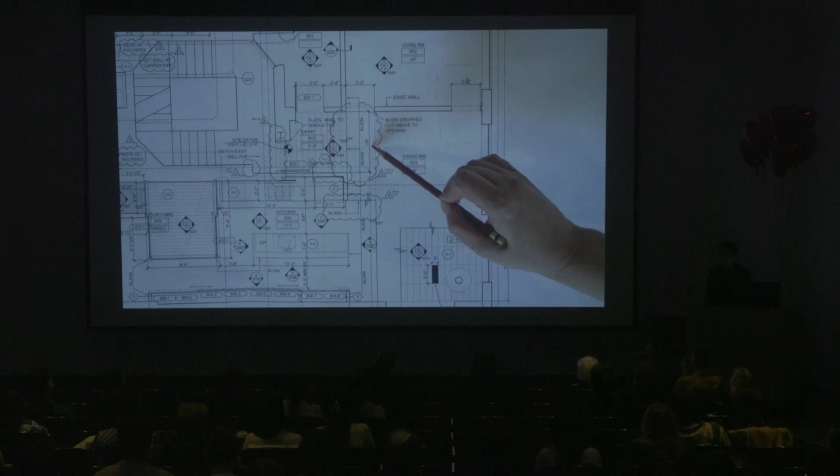So verify in field, these are three simple words. They're some of the most powerful words you might put on a drawing. I show a drawing here from an old project we did, VIF, the acronym. It's a conventional notation. It alerts the contractor that the drawings and the field might be different. There might be some condition in the field that we don't know exactly what's going on. We're inviting a dialogue with the contractor when we ask them to verify a dimension. We're also telling them what we think is really important. So I might say, this is important, this is not important, check that in the field.

I mentioned this to a contractor friend and he said, oh, you mean CYA? You know what CYA means? Cover your... but sometimes you can think of it as somehow contractual, like it's not my responsibility, it's someone else's responsibility. I think it's actually an invitation for dialogue.

I think as architects we tend to draw things at a distance from our medium. Their medium is out there, it's the physical stuff of building. Our world is actually the world of drawing, representation, notation, dimensions. Our drawings aren't pictures, they're instructions, they're contracts. I like to say, quoting Edwin Lutyens, an architectural drawing is a letter to a builder.

If you're writing a letter to the builder, what do you want to say? Please build my building carefully, build it accurately, ask me questions when you don't know exactly what to do. Those three letters tell us so much about the way we practice architecture, both the legal and risk landscape we're working in, but also the separation between disciplines and trades. So VIF is also a way of thinking about the split between the world of construction and the world of representation. These are two versions of the same thing.

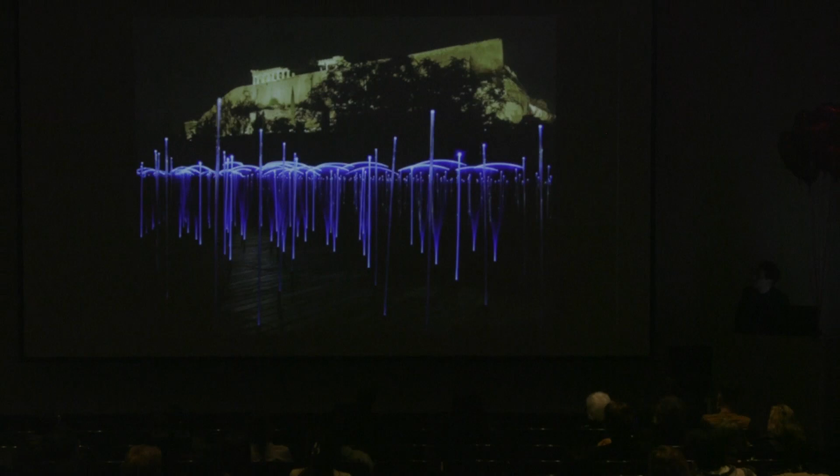The first book we did was called Expanded Practice. This is Meejin and I wondering, why do we have to stop when we get to the landscape? Why couldn't we do that too? Could we think about lighting as a medium for design? And what about media? Could we think about media as a material for architecture, just like concrete, steel, wood and glass? Maybe media and information could be the source of inspiration.

More recently, we've been working with more traditional materials like stone, discovering some of the properties and potentials of materials. This is our Collier Memorial, where we carve stone into what I call a conspicuous absence. It's a memorial to recognize someone who's gone. You go there and find this hollow and wonder what was here before. It's a kind of trace.

But this is a project we talk about as material after media. Every material is already filtered through our modeling, our sharing, our cutting, our robots fabricating, our digital survey installing. We're photographing it with a digital camera, sharing it on social media. It's always already digital, so it's traditional material, but after media.

So these two books, I think, summarize a position from: what could the expanded boundaries of architecture be, and what can we do with an expanded notion of materiality? These two publications bracket two modes in our practice.

I want to show a few different projects that exemplify some of these things, and throughout the lecture I want to point out certain things that might resonate with the themes that we're talking about for the charrette.

So this is a project that we proposed, a public art project, in Spokane, Washington. Spokane, a city of incredible beauty, a site of incredible resources and extraction, right, lumber.

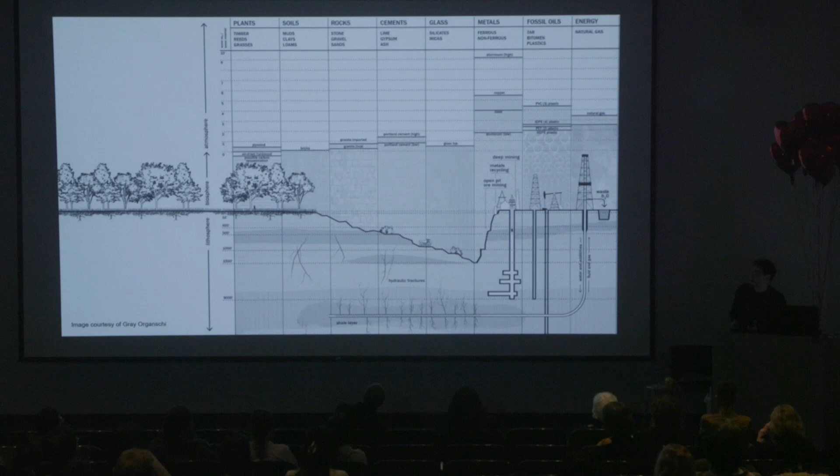And so we've been wondering about wood, and people are so enthusiastic about engineered lumber, mass timber. Can we use renewable materials to replace steel and concrete? We totally are excited about that.

But when I think about wood, I think about carpentry, I think about craft. Turns out wood today is a product—an engineered product. The dimensional standards are so large that it's not about a single tree anymore. It's about these large sheets, these large beams that have been designed to span longer distances.

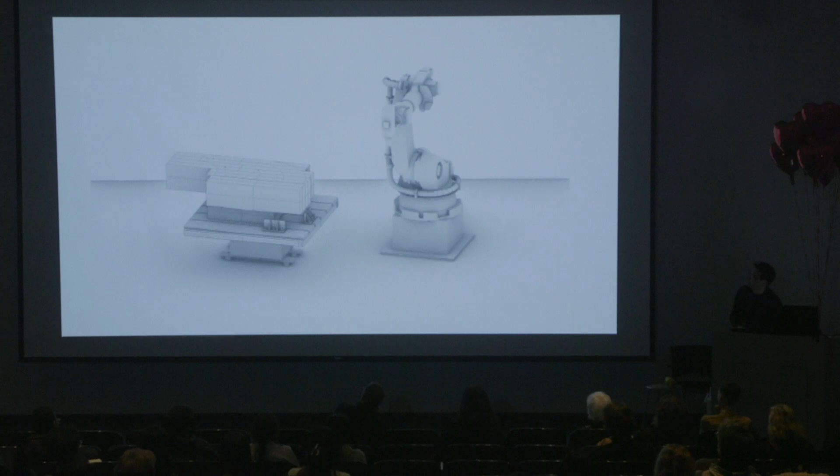As we started thinking about mass timber, I wondered, instead of replacing steel and concrete in the format that steel and concrete typically takes—like a beam or a column or a slab—what about the sculptural aspect of mass timber? Can we use its mass and its volume? So we looked at the kind of cutting movements of a robot and asked, would that give us a different capacity to shape?

We purchased a bunch of Alaskan yellow cedar and we lammed it up. We produced our own glulam, and then we started carving it into these three-dimensional forms. If the surfaces are not parallel, they start to become sculptural. Could we think about this massive mass timber as not just a replacement, but having its own syntax, its own vocabulary, its own formal capacity?

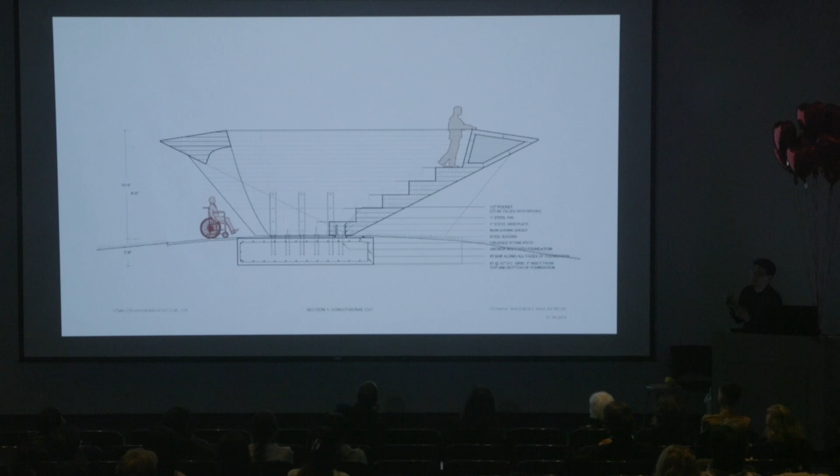So this is the proposal, this little mini amphitheater that's made of stacked mass timber that's been milled into these beautiful blocks. And look at this configuration here. This is a small social setting in a public park along the river in Spokane.

We imagine a person standing here, maybe gathering a group of people. Maybe it's for a poetry reading, maybe it's for a small concert or a performance. But there's also two audiences—maybe they're in dialogue with each other. We sort of imagine the social scenarios that this little structure could enable. In a way, that motivates the whole project: can we imagine a kind of conversation here, a kind of a happening, if you will?

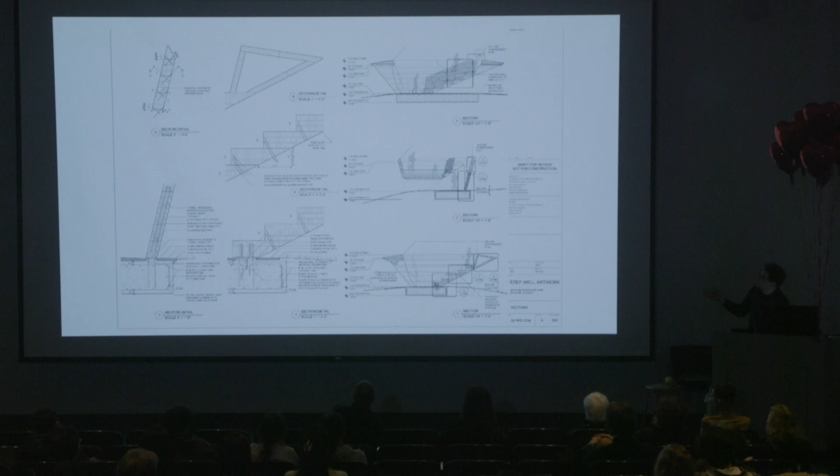And so we proposed this, we got the funding for it, and we started working with fabricators to make the components. We learned how to assemble mass timber because we didn't know. Whenever we find something curious that we don't know about, we make a proposal and then put all of our attention there.

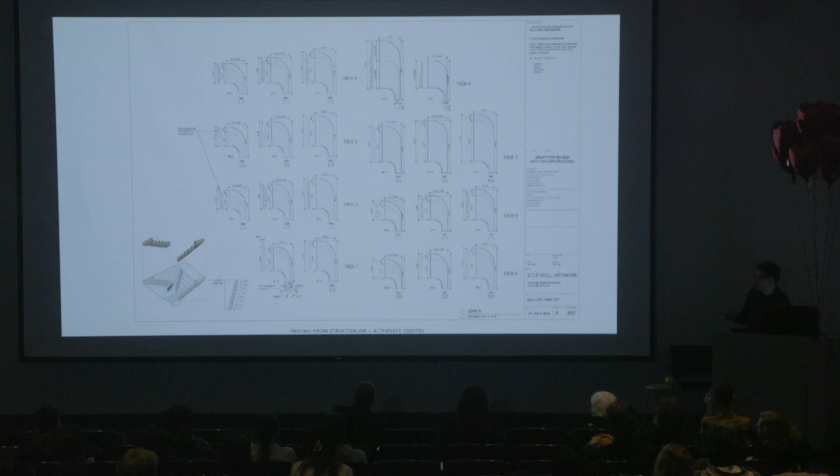So how do you work with mass timber? What are the largest sizes we can make? Can we make them in the shop and bring them to the field? Do they fit on a truck? How do they get assembled, in what sequence, how long would it take? And could this be something that's quickly assembled in the field and then erected to produce this kind of sculptural folly, if you will?

It's a folly in the sense that it doesn't really have a set program. It can accommodate just about any program.

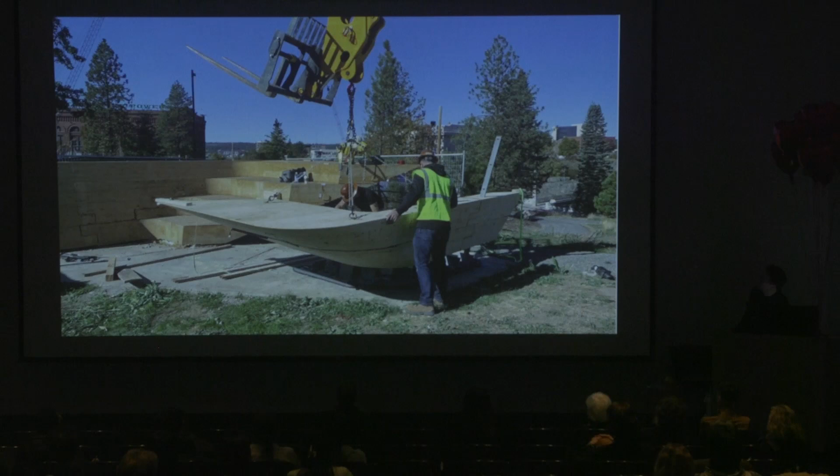Working with fabricators, we learned about carving mass timber. What are its dimensional qualities? Does it expand and contract with humidity? Yes, it does. How do you shape it into something incredibly beautiful where the grain of the wood is still legible? And how do you stack it, how do you erect it, how do you fasten it together? Mass timber requires long stainless steel screws to tie it all together.

So this is us compensating for a lack of knowledge and a kind of curiosity about a new material, trying to build a kind of set of experiences and build some expertise.

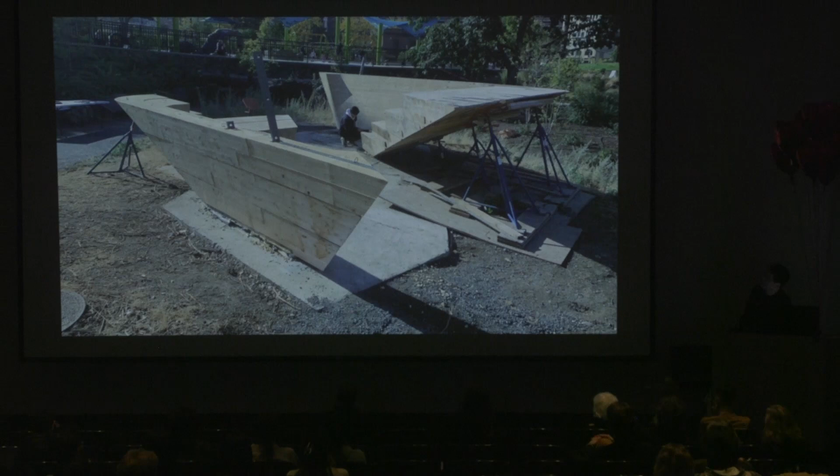Architects are confronting new materials all the time. How do we know enough about those materials to be able to propose a structure, whether it's a piece of architecture or a kind of proto-architecture like a pavilion in a park?

Thinking about parks and public space, a lot of our work has to do with environments that are social settings, whether they're landscapes or urban contexts. We have been working around the world.

We've been doing a number of projects in China, and I want to show a project that was completed over the pandemic. This is Shanghai, the Huangpu River. This site here was an industrial site that became the expo site in 2010. So that was an expo.

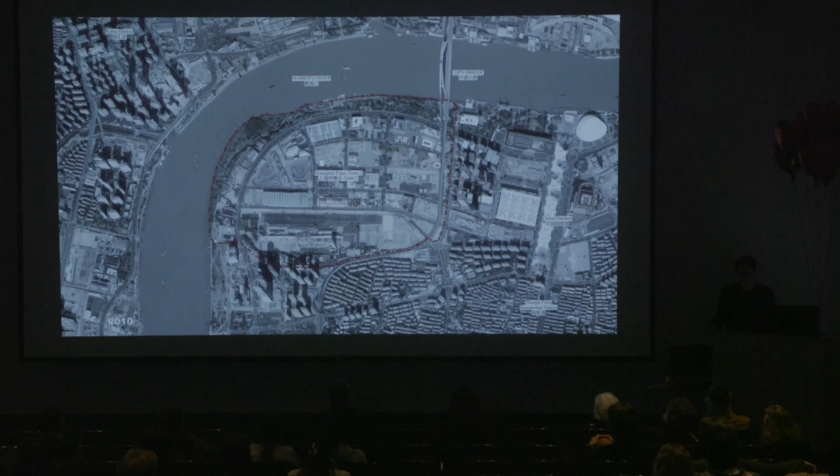After the expo, the Shanghai government decided to turn it into a park. Some of the historic pavilions are still there. There are also new buildings, this one by Snohetta. And there was a competition for 2 bridges over an artificial lake in this new park.

Our proposal was, rather than 2 bridges, let's make one and put a hole in it. So it's one bridge that is punctuated by a series of figural openings, if you will. We call it the Moongate Bridge.

We have these circular cutouts, and those circular cutouts traditionally frame views in a garden. We thought maybe rather than framing a view, we frame the water and we frame the sky. So we proposed this as a new landscape, as a kind of extension of the park.

It wasn't about a kind of efficient span, like from an engineering point of view. It was about a kind of landscape continuity from a public point of view. It was about sponsoring events where you could stand here by yourself, or you could gather as a large group. So what could we imagine in terms of gatherings for different sizes of communities?

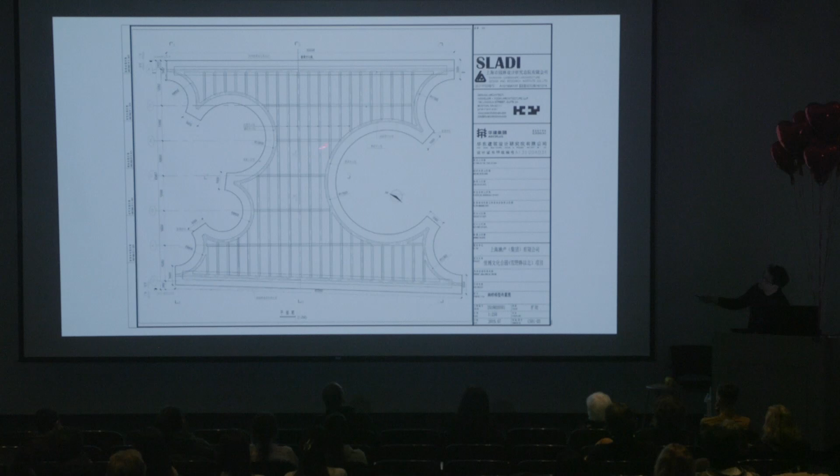So 1 or 2 people versus a whole community. This competition, we were surprised and delighted to learn that we had won.

And we got a message like 6 months later saying, oh, you've won, we've been developing your design, but we can't seem to get it approved. Would you come back and help us get it approved? So that's fairly typical, actually, unfortunately.

So over the pandemic, we were thrilled to see the development. This is the deck, a concrete deck, and the artificial lake. We were surprised to learn that they'd put a parking garage under the lake. So it's a bridge over a lake over a parking garage.

So it's a new nature. It's not nature like the way you thought it was. It's actually all constructed.

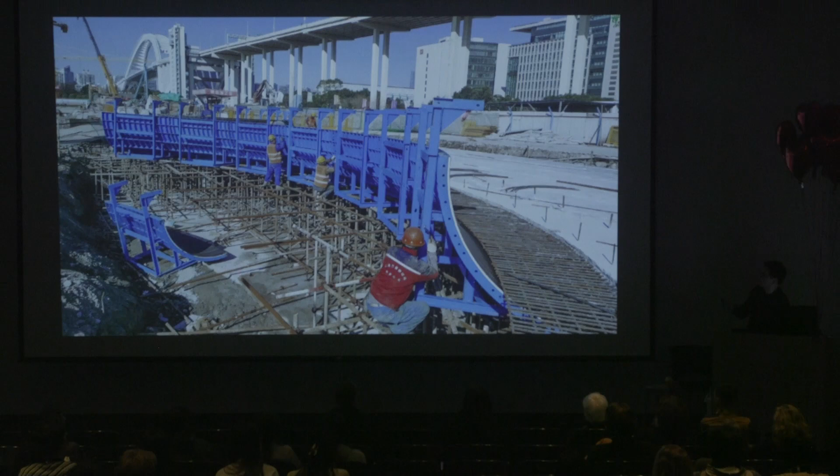But in China, they say anything is possible, but nothing is easy. So you can build a compound curved toroidal concrete formwork that produces something as beautiful as this underbelly for the bridge.

And then on the inside, we wanted all the granite blocks to be articulated. So as the granite pavers fold up onto the surface of the parapet, the rotation of the granite blocks turns, and we see the little edges of every little block. So it's not smooth, but it's calling attention to all the part-to-whole relationships between the module and the big urban gesture.

So this happened actually over the pandemic. They completed the bridge, and we get these moments of solitary, contemplative space. You're looking out over the landscape, but you also have the capacity to host a big event.

You could imagine a festival taking place on this bridge. It's basically a plaza that happens to span over the water, which is spanning over the parking garage.

Thinking of water and ecosystems, a few years ago we proposed an installation, a public art installation in Philadelphia. This was called Float Lab. Philadelphia, as you know, is a city between 2 rivers, the Delaware and the Schuylkill.

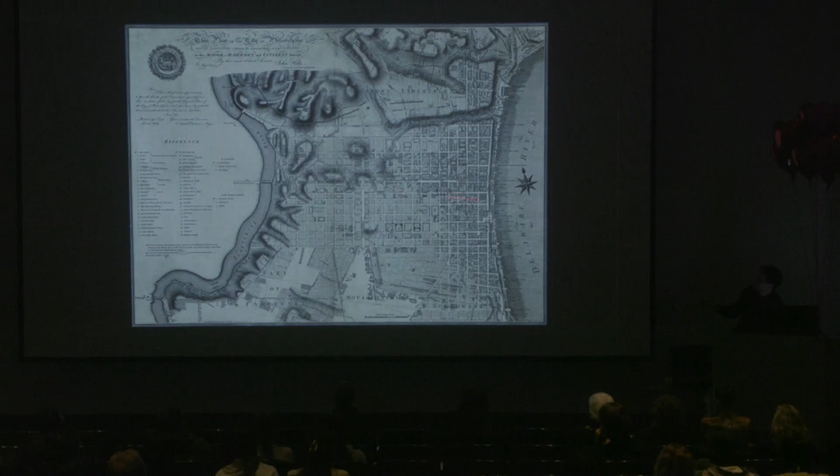The grid that spans between them was a site of commerce, of trade, but if you follow the river, the tributary, up, you get to coal country. This was a site of extraction, so coal was being shipped down the river. It was a highly polluted riverway, and it is the kind of original Superfund site.

So the remediation of the Schuylkill River was, before they had Superfund sites, they were trying to remediate the ecosystem at the Schuylkill River. They say that it was so polluted it caught on fire. Imagine a river catching on fire. Actually, not that hard to imagine.

I think of Philly as this quaint historic city, but it's actually this sort of center of energy and extraction. And so how do we tell the story of this river? How do we bring people back to the waterfront?

I think some cities turn their back on the river. And Philadelphia was saying, we want people to come back and experience that river waterfront. So Bartram's Garden is one of the original botanical gardens in this country.

And so we partnered with Bartram's, we partnered with Philadelphia Mural Arts, and the Float Lab was positioned right off of Bartram's Garden. The mission of Bartram's is to expose urban Philadelphians to nature, to species, to ecosystems—a kind of environmental and ecological education.

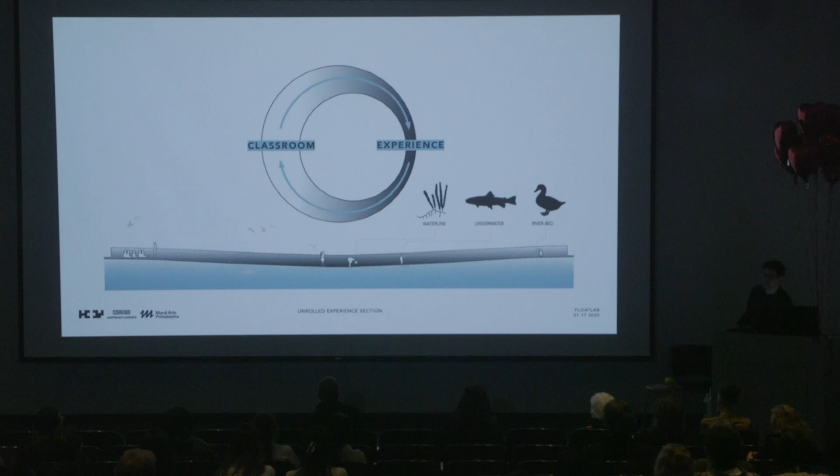So the idea was that this barge was essentially an outdoor classroom. You come to the classroom, you experience the river in a certain way, you take away certain experiences, and maybe when you go back to your home or place of work, you behave a little bit differently. Why? Because you've had this exposure to the river, and it's changed the way you perceive landscape, the way you perceive nature. We call it a kind of eco-literacy.

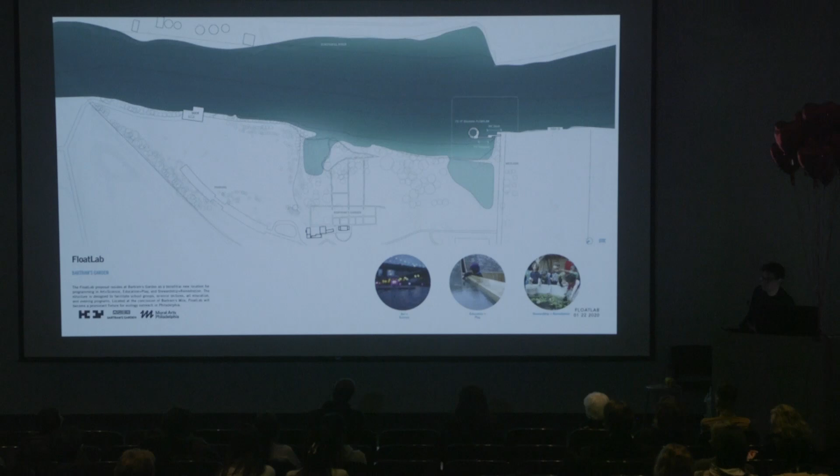Can we use an architectural intervention to build a sense of eco-literacy? So this is the proposal: a floating barge, but importantly, it's also a submersible. In order to bring someone into this eye-level perspective of the water, we need to sink the barge. It has a chamber of water so that it sinks.

It's kind of a controlled capsizing. There's a chamber of air and a chamber of water to bring it down to the water level just the right amount. This is a study model, so that you get that experience.

So this is a prototype we built. This one has steps in it. But if you fill the tank, you basically get that eye-level view of the river because the submersible is full of water. And that's monitored and pumped to make sure it doesn't sink too low.

This principle was tested as a mock-up, and we like to build a lot of mock-ups to prove our ideas. We spent $50,000 to build this mock-up, painted it yellow, and brought the William Penn Foundation to the site. They were like, this is awesome, this is so impressive, let's fund this. So they funded the project with $2 million to build the yellow submarine.

That will ultimately be exhibited next summer, I think, in the Schuylkill River. So if you're in Philly next summer, come and see the Float Lab project in the Schuylkill.

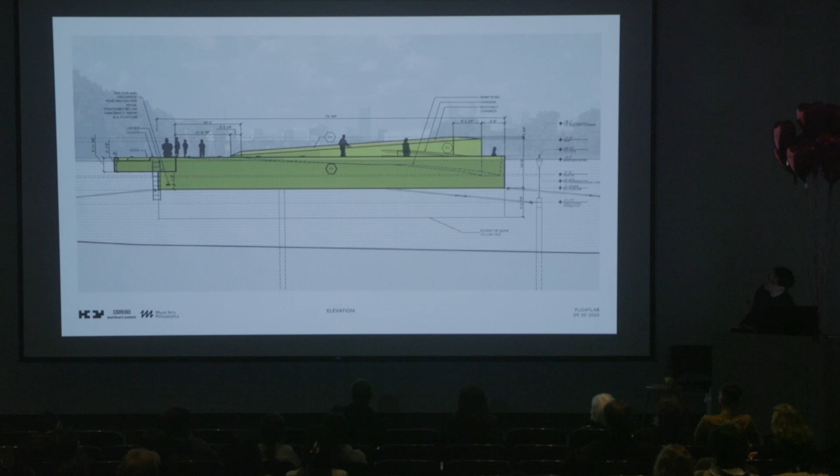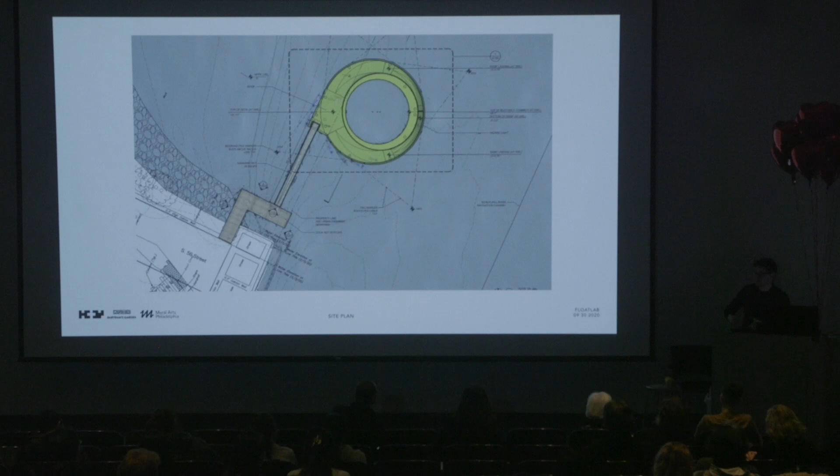These are some more technical drawings, like how do you make a submarine work? We're not sure—we're often, I'd say, beyond the traditional limits of architecture, so we don't know about submarines. We actually hire a naval architect, a boat designer, barge fabricators. I think the thing about architecture is there's so much we don't know that we just need to collaborate, we need to partner, to build a kind of experience and expertise.

So this is the Float Lab project. We imagine different kinds of interactions happening here, where people are interacting with each other, interacting with the periscopes, interacting with kayaks, interacting with the ecosystem around them.

And you think it's all about renders and beautiful renders, but also it does get fabricated out of steel, and it's welded together, and it's tested, and it's shipped, and it'll launch next summer. So I still get goosebumps when I see architecture turn from a drawing into a thing, into an experience, into something that people interact with.

So that's pretty exciting. We've been thinking a lot about the public—how do we build a kind of public, an educated public, a discerning public? We have faith in institutions. We have faith in our political system.

I love this quote by MLK: if we were to be a great democracy, we must all take an active role in our democracy. We must do democracy—the doing of democracy. It's not a concept, it's actually an activity. We have to exercise—someone talks about civic muscles. We have to exercise our civic muscles by voting and participating.

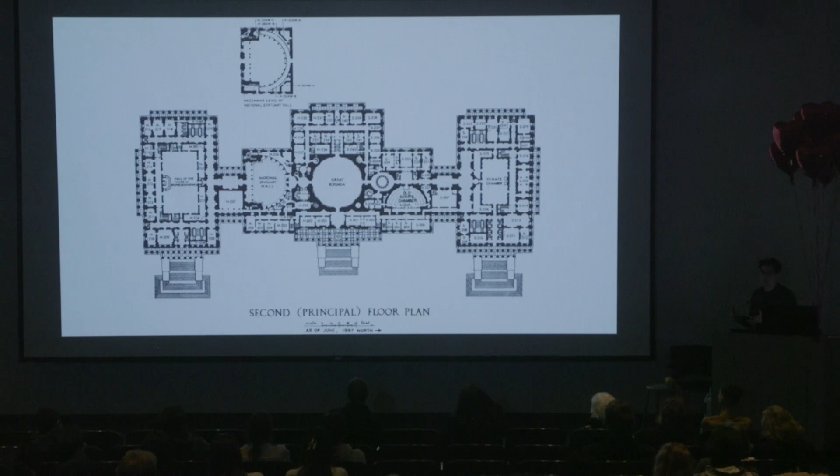At the same time, we interviewed to design an Institute of Democracy at the University of Virginia. So as part of our research in terms of what an Institute of Democracy should look like, we wondered, what do spaces of democracy look like? And so we started doing some research in terms of the hall.

You know the House of Commons in the UK. It's organized like two halves, and the structure of the room is the structure of debate. It's facing each other, confrontational, and that particular arrangement of seats produces a certain culture of politics, a certain debate culture. I think about the United States and our half circle, the horseshoe. Turns out Russia has a rather frontal configuration. And I've never been here, but I love this idea of the pure circle.

We started thinking about democracy and this relationship between, as Antoine Picon would say, decor, like the space, and decorum, like the practices. Or as Steven Levitsky and Daniel Ziblatt wrote in their book—what was the name of that book—it was about the death of democracy, the end of democracy. Anyways, they talk about the unwritten rules, and when unwritten rules start to erode, that's when our democracy starts to fail. I think about architecture as participating in that kind of gray zone of unwritten rules.

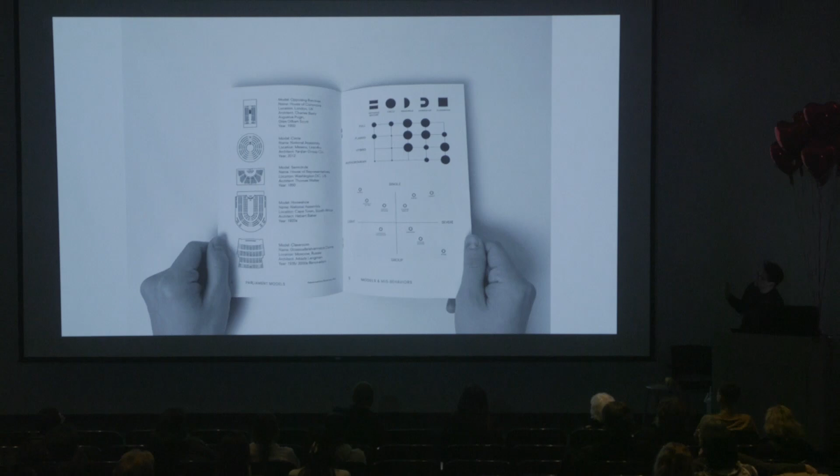There's a kind of behavior that's expected in a lecture hall. There's a behavior that's expected on the sidewalk. There's a behavior that's expected in an elevator—you step into an elevator, you behave differently, right? And so these sensitivities led us to do some of this research in terms of sites of democracy, sites of participation. This became an exhibition we showed at the Cooper Union two years ago called Model Behavior.

In the meantime, we're working at UVA again. So this is the famous lawn. The memorial is right here, actually. This is Jefferson's Academical Village. UVA is building a kind of—I think they call it the middle. This is Central Lawn, Central Grounds. Maybe that's North Grounds, maybe these are West Grounds—I don't know, it's a new master plan.

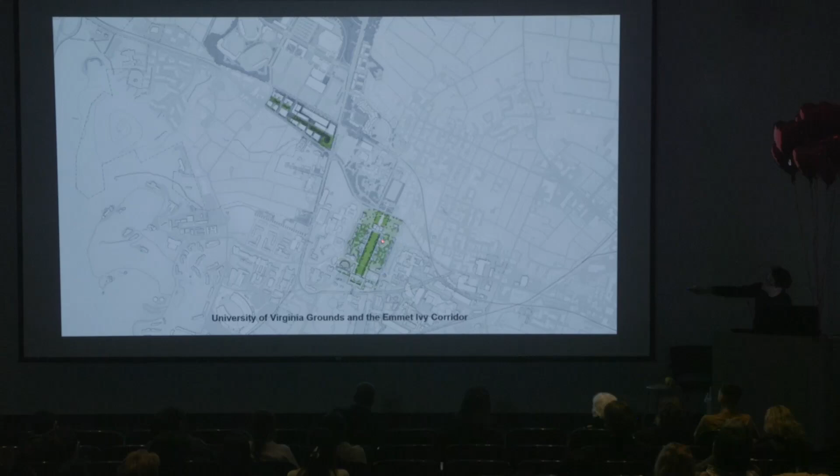It's a new part of campus, and the Institute of Democracy will be the terminus of this new lawn, just as the rotunda is the terminus of the historic lawn. So that's a lot of pressure. They're also building a school of data science, a hotel, a conference center, and a new performing arts center and museum. These are all arranged around a rather formal landscape, and the Institute of Democracy is the terminus there.

So working at UVA, we had to think about what's an appropriate response to this very frontal, formal axis. How does Jefferson's Rotunda respond as a kind of figure and a colonnade? Our Institute of Democracy interprets that, redeploys it, making the hall—there's a big lecture hall—kind of analogous to the rotunda. It's a sculptural figure seen through the screen of columns.

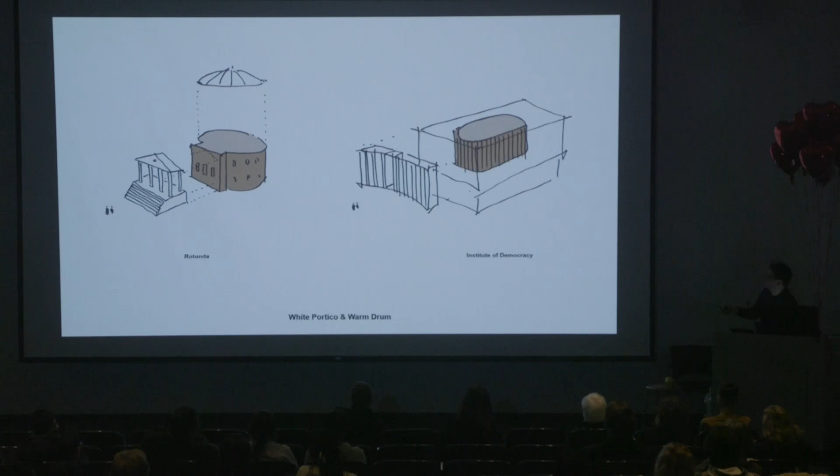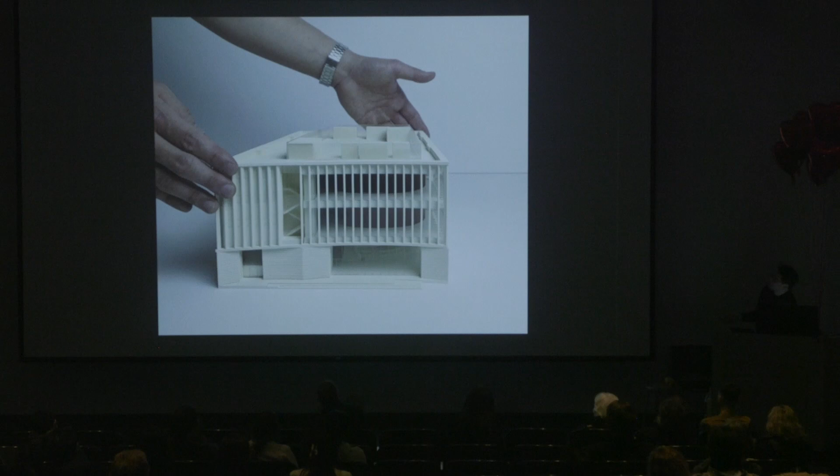Whenever we studied this project, we always turned the hall itself into a kind of figure. This is an academic building—there's no government meeting here—but still, as a room like this one, where scholarship is being presented, ideas are being debated, it has its own decorum, its own social codes, and its own presence on campus. So there's a kind of rotunda embedded within this Institute of Democracy that's legible, accessible; the base is open and porous. We're trying to bring people in, show them how to get to that hall, and show the different parts of this building stitched together.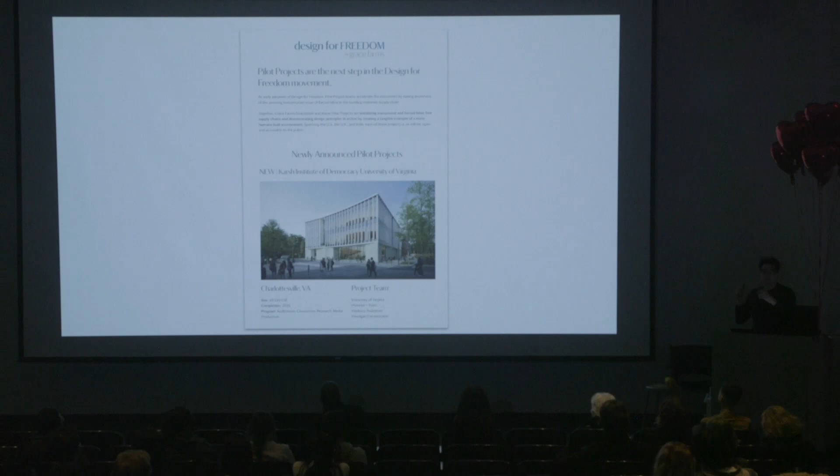Another exciting thing is that it's a pilot project for Design for Freedom, which isn't really a sustainability metric like LEED, WELL, Passive House, or Living Building Challenge—those all have different interests. Design for Freedom asks where our materials come from, who made them, what we know about those people. Can we certify fair trade architecture the way we certify fair trade coffee or fashion? Can we say this building has no forced labor? That's obviously hard in a global supply chain, but Design for Freedom asks those questions up the procurement chain to understand materials and try to certify they're made without forced labor.

More public realm projects—this is a proposal in Chengdu, a residential development with no cars. Many of the waterways have pedestrian bridges, and there's an electric car network passing through. We were asked to design this pedestrian bridge, and we asked who's doing the landscape. We didn't know, so we thought maybe our bridge could produce the landscape.

The idea was that the bridge is a series of linear members fanning relative to each other, and in their rotation they produce the dimension of the bridge while also producing the terracing of the landscape. I like that the same technique producing the underbelly of the bridge also produces the top surface of the landscape.

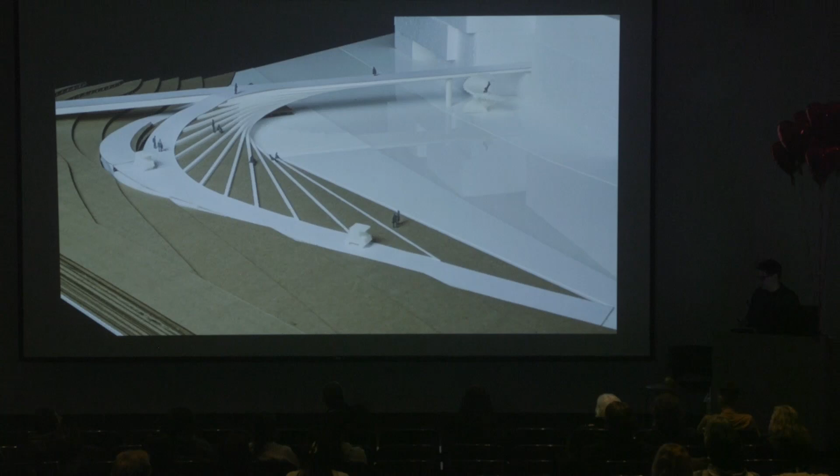These diagrams show its conception—it actually worked better with a curved stick. The curved sticks are arrayed and produce the geometry of the bridge. The underbelly is part of the beauty of it, with a twist happening as these ribs turn into retaining walls in the landscape.

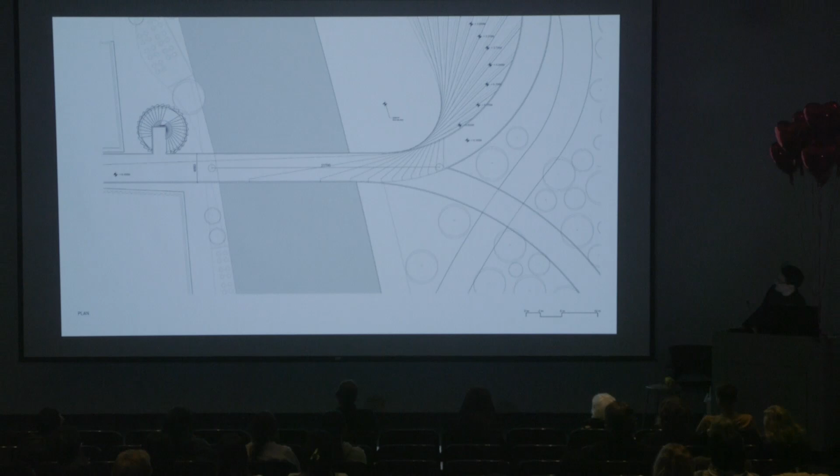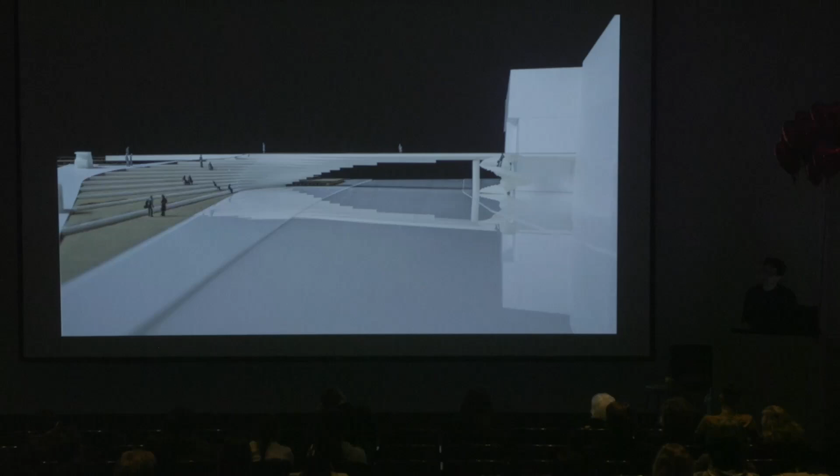Those are views of the top and bottom surfaces of the bridge. We believe design that anticipates its construction is better, so there isn't the surprise of figuring out how to make it. If we imagine a rotated piece of precast that's also a retaining wall and also a soffit condition, that helps us think through design differently. I call it a kind of tectonic imagination—if you can imagine something and how it's made, what materials, what trades, what crafts, that helps.

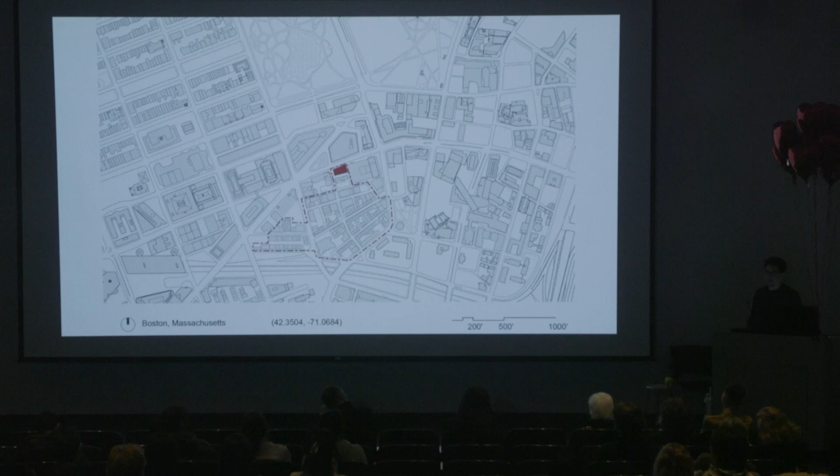Another example is a building in downtown Boston, near our office, in a neighborhood called Bay Village—a beautiful little neighborhood of two- and three-story brick buildings surrounded by taller buildings, famously called the High Spine by Kevin Lynch. In this condition between the historic neighborhood and the High Spine, a developer asked us to propose a multifamily building, which happens to be in a historic landmark neighborhood. So we had to appear before both the Boston Civic Design Commission and the Boston Landmarks Commission—a crash course in historic preservation and landmarks permissions.

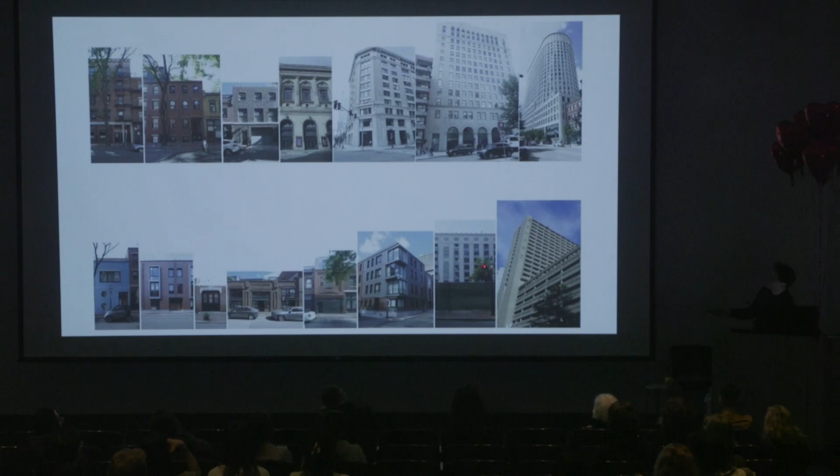So we surveyed the buildings around—there are beautiful little buildings like this, but also others like this, with plenty of classical and Beaux-Arts architecture.

So when we were asked to make a 20-story building here, we said, not only are we making a building, we're completing that street. The street has only one side. Let's make the other side of that street.

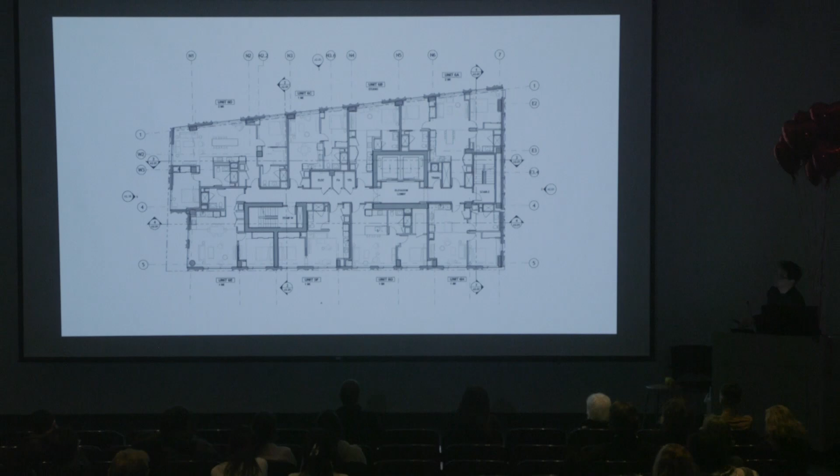So this is the floor plate. It's a 7,000 square foot lot. We have 7 units packed in there really tight.

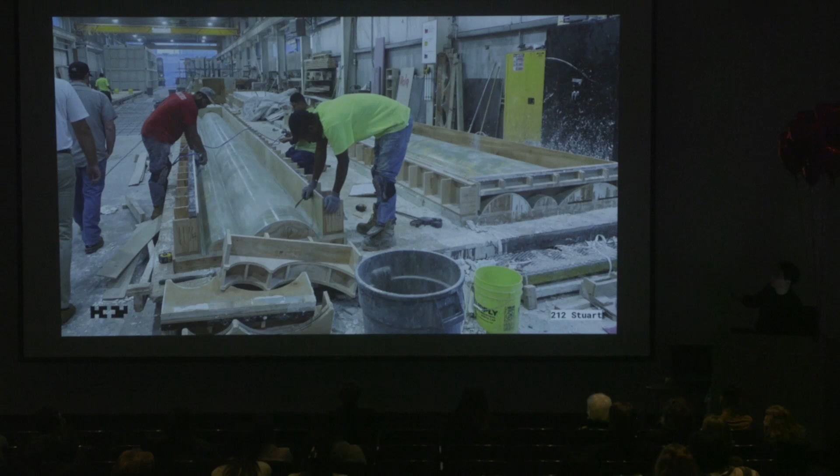We imagined them really long, because we knew they had to come into the city and get hoisted onto the building. So we tried to find a module that was extremely long, 30 feet long, that would go up 3 stories at a time. We thought we could be smart and optimize the number of molds. Turns out the mold isn't the cost, it's the crane time. So it got optimized not just for molds, but also for weight and the time it takes to erect it.

So if you ask a builder, what would make more sense? How could we save some money? They'll tell you that the panel size is key because it takes time to pick up every panel and hoist it up. So I think listening to the people making the building, asking questions like what's an optimal weight, what's the optimal width, how long can we make it.

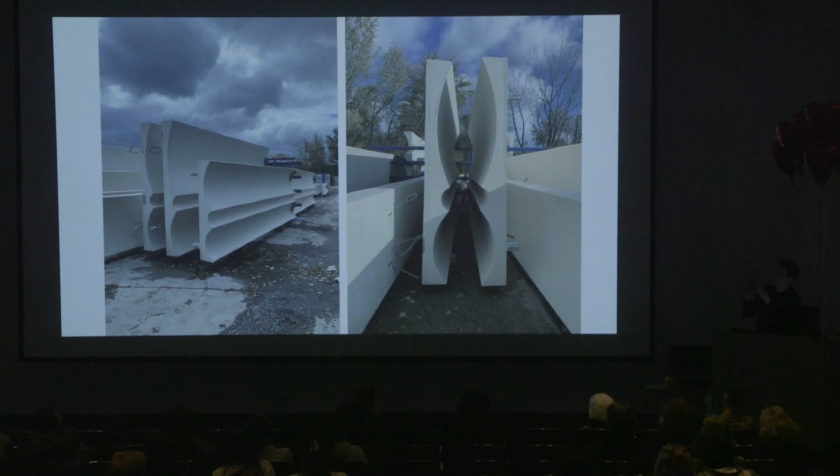But as they were making it, we noticed how beautiful these shapes were. It's almost like a Brancusi, that space between these concave surfaces. And when they were erecting it, I took this picture. This is a 30-foot panel. You see this little guy here. These are 30-foot panels.

So it has a kind of abstraction, and it's hard to understand how big it is because we usually expect joints here and here. We expect architecture to be a bunch of parts that have been assembled. And when those parts are proportioned differently, they really transform the perception of the building.

So here it is under construction. With the panels, the glazing was imagined as a series of infill panels between the sculpted exterior. And we get this photograph that's just, I think, quite striking with its undulation and the way it casts shadows.

I think working in a historic neighborhood is not about this style or that style. It's about a sense of quality, a kind of attention to detail. It has thickness, it has depth, it has something that seems like it would endure.

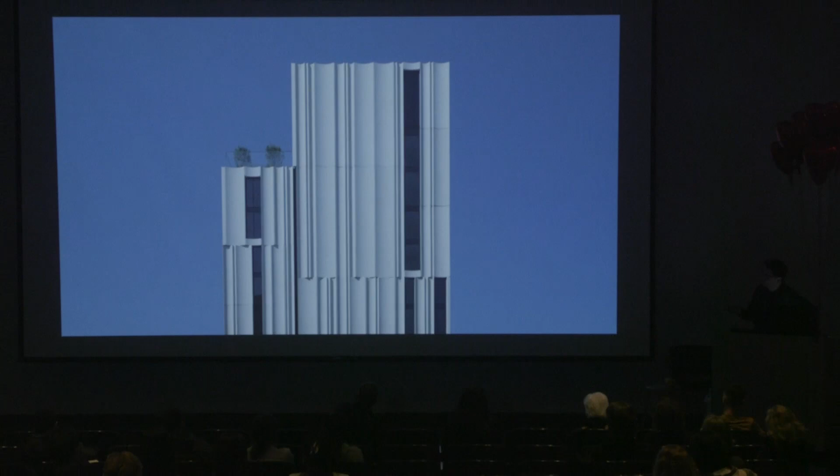And so when it meets the ground, this was important — these are the neighbors that come to every public meeting, the guys across the street. They said, I don't want to see your loading dock, I don't want to see your mechanical screen, I don't want to see all that stuff. And we said, no, we'll put the loading dock on Stuart Street. We'll have 2 more front doors. These will be stoops. And when you open your door, you'll be looking at neighbors, not looking at loading docks.

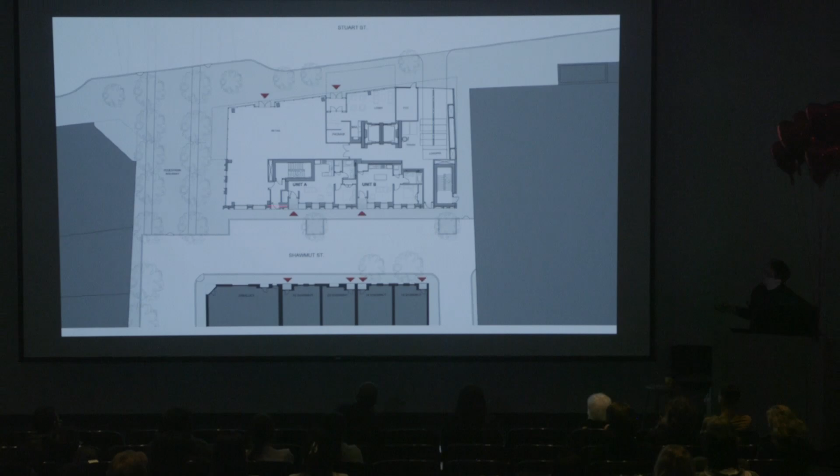And so we designed 2 townhouses facing these 2 townhouses. And when they open the door, they look out, they see a planter, they see some ironwork, they see a wood door, they see neighbors. That's such an important lesson. Developers are trying to create all this density, but how the building meets the ground and completes the street with neighbors — I think that was an incredible breakthrough that was probably the thing that allowed this project to go forward at all.

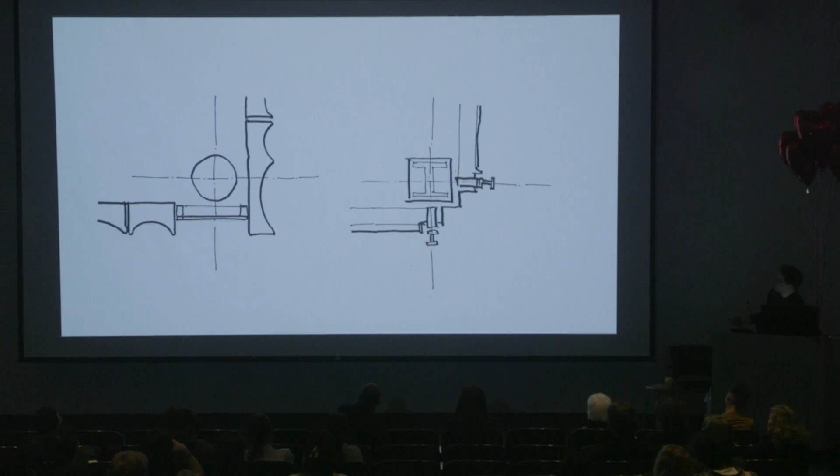For the architecture construction nerds, I always show the Mies Seagram Building corner, and then this is Stuart Street, where we have the panel and then glazing and then panel, alternating back and forth as it goes up. I talk about this in my construction class. Mies is showing us the way the building is assembled of parts, standardized parts that reveal the kind of half column on the corner. Instead of Mies, we have an alternating biased panel with the glazing alternating between opaque and glazed. So it's a riff on that.

I love the fact that the pier meets the ground, and when it meets the ground, you can almost stand in it. It's almost like it's hugging you, right? It's almost the scale of a body. So even though we're playing games with the perception of the building's height, it still has this scale of the body almost inscribed in its geometry.

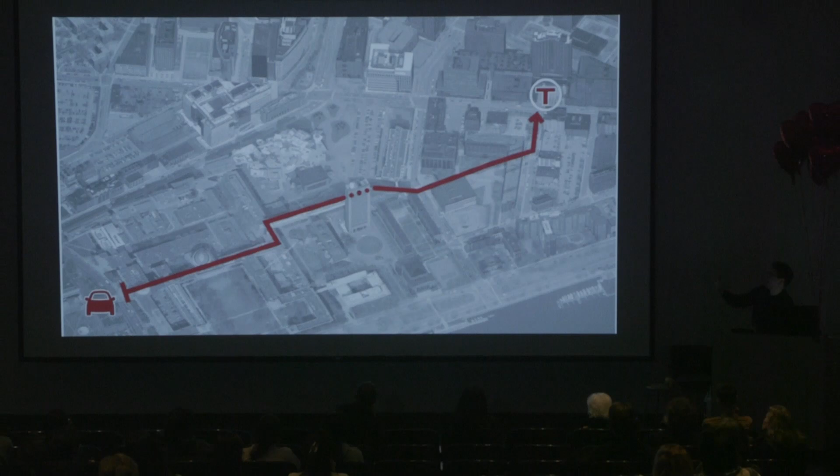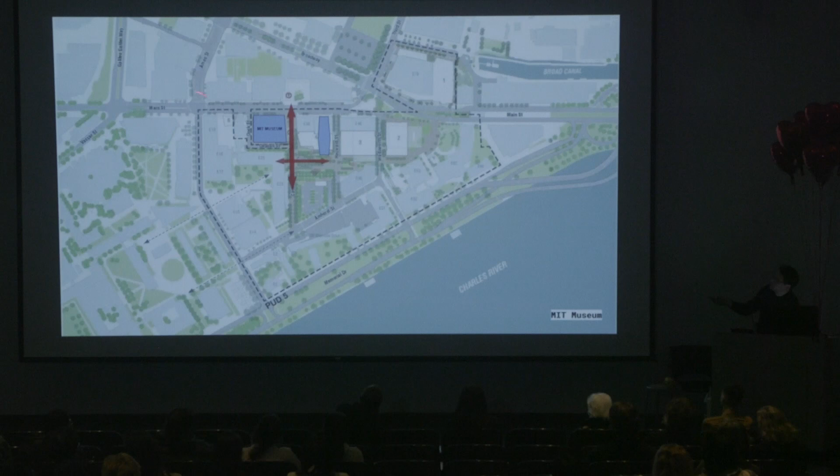When we think about public space and activities, the public space doesn't stop when you go inside a building. This is the MIT Museum that we conceptualize as on the other end of the Infinite Corridor. If you know MIT, there's 77 Mass Ave, this is the Infinite Corridor. This was East Campus, and it had no 'there.' People showed up there and said, 'Where's MIT?' So there was a series of buildings built called the East Campus Gateway, and the museum was one of those anchor programs meant to announce MIT.

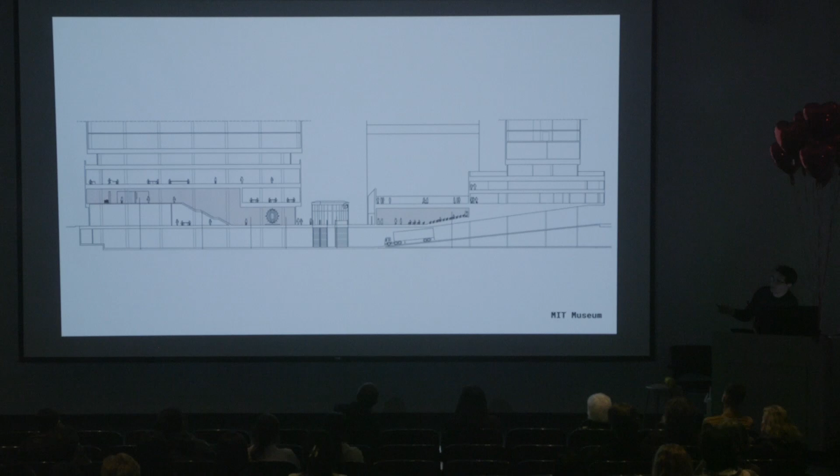So this was a dormitory building designed by Nader Tehrani. This was a core and shell office building designed by Weiss/Manfredi. They're tied together with the below-grade parking. But the MIT Museum was occupying the bottom 3 floors of this office building, in a way separated from the shaft of the office with this sort of podium scale.

So we thought about, well, what is a museum? Is it about display and collect, which is what many museums are? There's a front of house and a back of house. We said, what about teach? It's a teaching museum, and could we make space between display and collect for teaching? This was a kind of crude diagram. I think people that know museums know that that's actually super inaccurate.

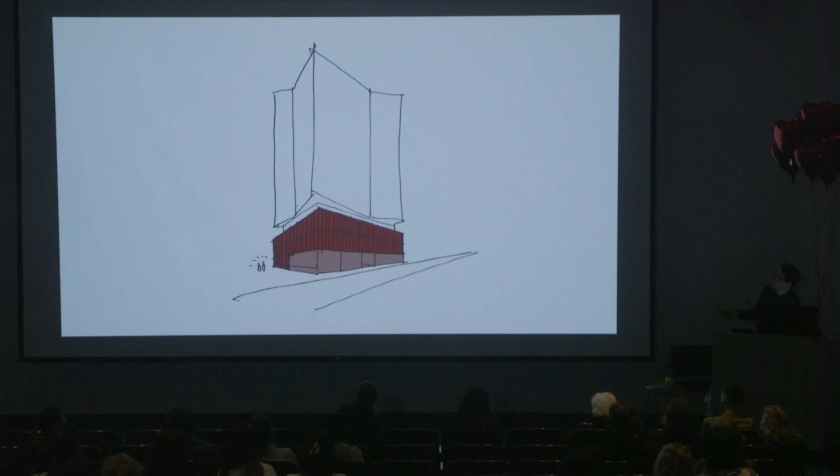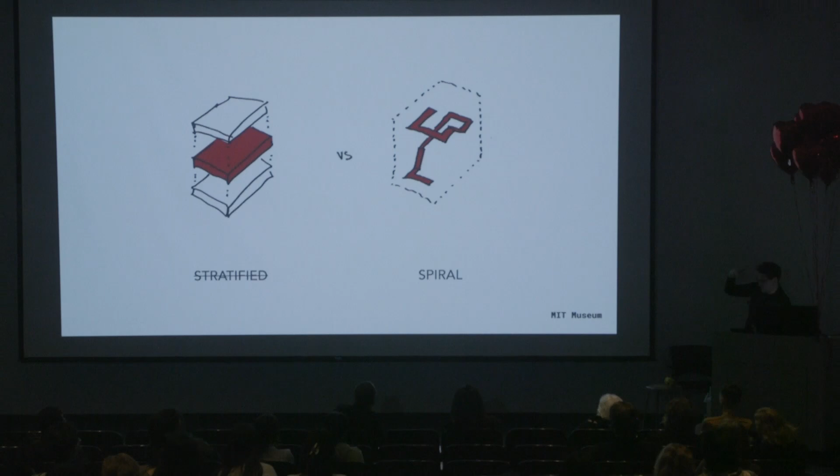But at the base of a building, how do we think about 3 stories of museum program? We talked about, is it stratified? Like, is there an administrative floor versus a gallery floor? We ended up doing a spiral where the galleries are on every floor, so that everyone has a reason to go to the ground floor, the second floor, the 3rd floor. We distributed the galleries as a kind of continuous loop.

And this concept model, which we showed to the director of the museum, he's like, oh, I get it. You don't want people to stop at the 2nd floor. You want them to go to the 3rd floor. You want them to peek into the collections area, the seminar room, and the conservation labs. All those educational spaces are accessible to the public on this circulatory loop.

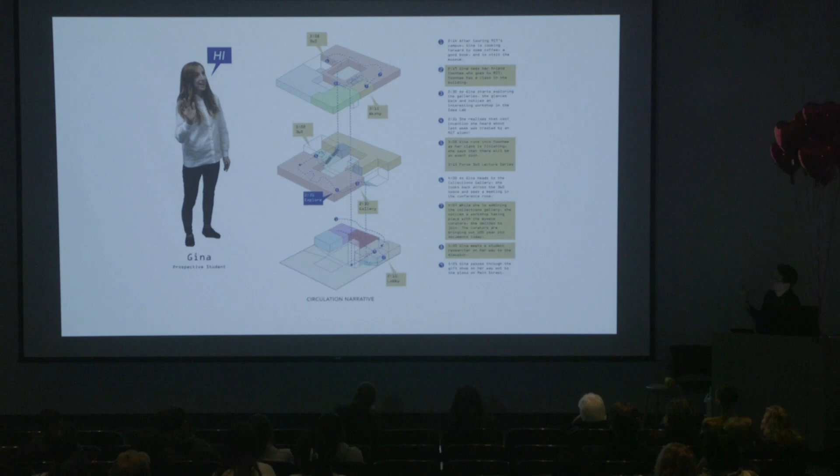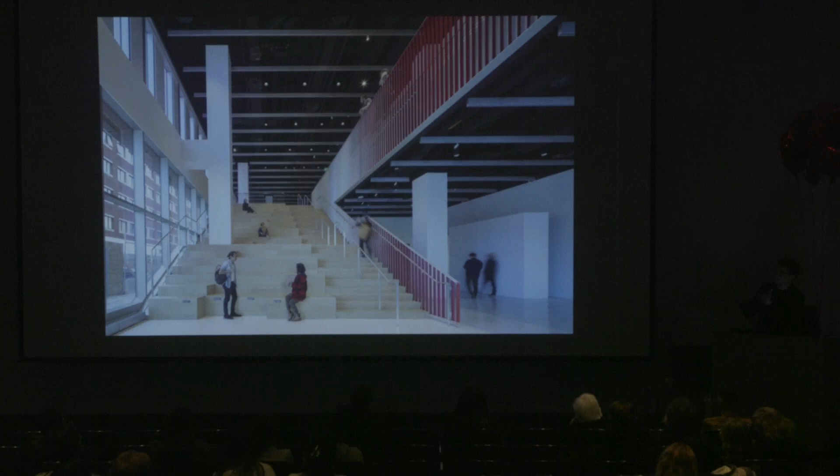So that was the concept, that when you enter, you see where you're going, and you see the alternating gallery on either side of that floor. We imagined a kind of scenario and a kind of circulation, and then we realized it with large cutouts that become cascading bleacher seating. The gallery has a system of baffles that are both hangers for suspending things, but also light tracks. They also create a texture and a rhythm, so that when you're circulating through the museum, you're working against the grain or working with the grain.

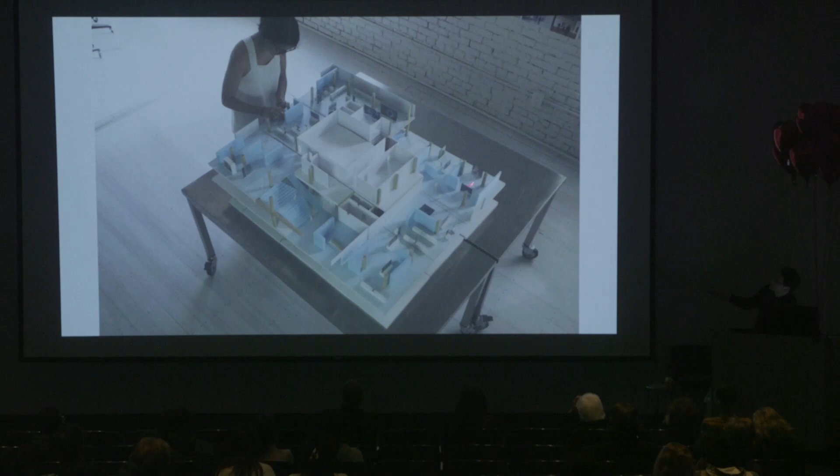I did this little diagram, which is like, this is really an office floor plate with a center core, but you're circulating in a clockwise fashion, and the grain on the ceiling is what binds it all together. So thinking about how do we encourage people to move through and pull them through and orient them as they move through. Here we see the ceiling as a kind of texture that orients you as you move through the museum. We conceptualized it with these big physical models, and then here with the grain.

Museums can be quite disorienting, especially science museums, which are full of objects. But I think thinking about the infrastructure for those exhibitions helps to orient the visitor through the museum. And then this is my favorite part: as you go from the 2nd floor to the 3rd floor, what's tucked underneath there is the education, the classroom. So the idea that you're coming from front of house up to front of house, and the education classroom is not back of house—it's actually, I call it side of house.

As you're walking through, you see, okay, I'm going to go up there. What's going on over there? Or I'm going to go up here. What's around the corner there? That sort of curiosity about what's around the corner, that's the side of house. That's what we're trying to draw people into—these other programs that invert some of the traditional front, back, you may come here but don't go there.

This is a circulation space, but it's also a kind of event space. The museum director likes to host events here where they'll have an audience sitting on the steps, a kind of panel discussion, and then people will be leaning over the rail to participate in the event.

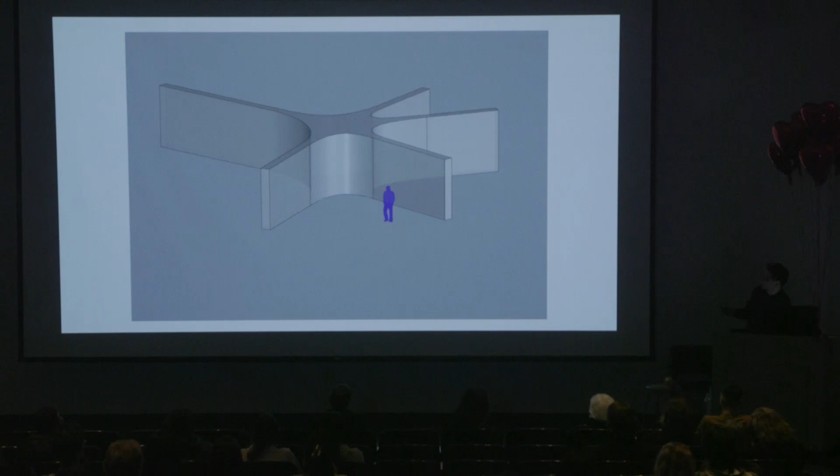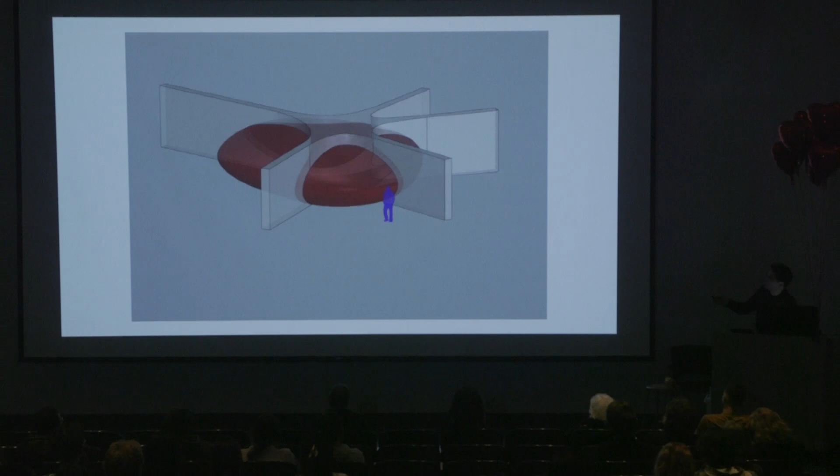We put an asterisk on the site. It actually looks like the plan of our memorial, but it's a hand, a 5-sided figure. Someone said, could it be a star? We said, we don't want to do stars and stripes—that seems too direct, but maybe it's abstract enough. Maybe it's got 5 fingers, and maybe we intersect it with something. Someone said, could it be a boulder? We said we don't want a boulder, but maybe a missing figure—something that was there and now is gone. So we intersected it with a boulder shape, and we get the trace of this missing figure. What's left is really the edges, the surfaces that touched it.

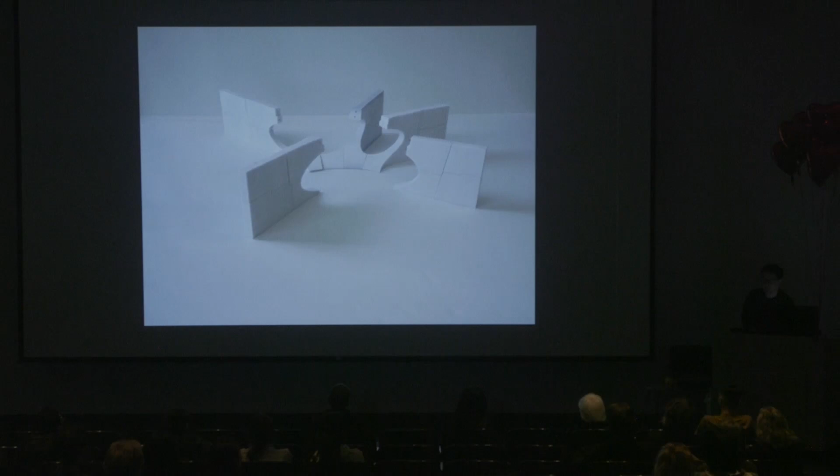Okay, so we proposed this form. Megan said, hey, could we make it solid? Could we make it solid stone? Because the contractor was talking about veneer or something, and she said, I don't know what you're talking about—I think it should be solid, right?

And so then we said, if it's going to be solid, then it's really an arch. There's a keystone to an arch—it's trying to fall, but it can't fall because there's a stone next to it, and a stone next to it, and a stone next to it. The principle is so simple: it's just compression. It's a stone trying to fall, but it can't fall because it's being supported by a community of other stones. This idea of, we are going to balance each other out, we're going to help each other—we're all different, but we're all finding a kind of stable condition.

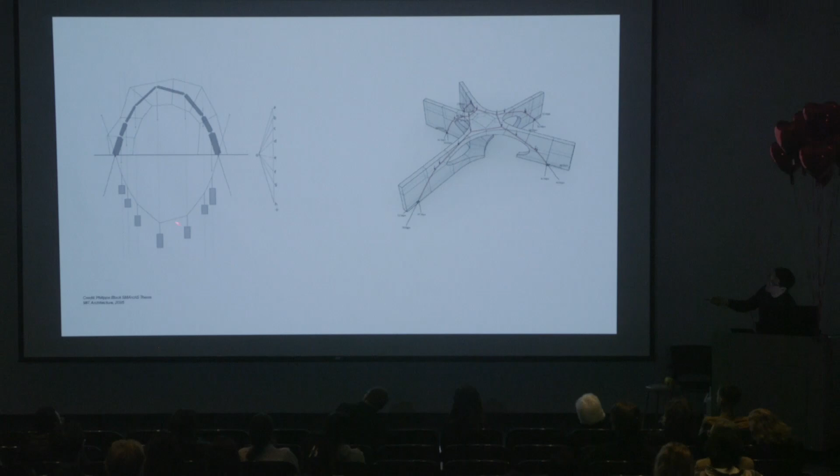This diagram was introduced to us by John Ochsendorf, one of our collaborators, a structural engineer. He said a pure cable finds a catenary form, and if you invert that catenary, it's a pure compression structure. So the invertibility of the compression arch is really a catenary cable—pure tension, pure compression.

The trick was to get a contractor to agree to a price to build a stone arch in a way that most people were kind of afraid of. They're afraid of pure compression, so they wanted some cables in there that they could post-tension, a little bit of belts and suspenders, you know. Contractors want to have some certainty.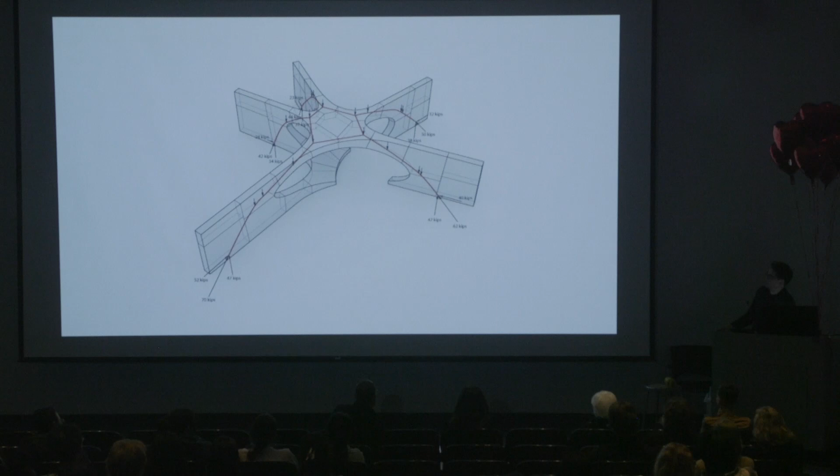We said, maybe we can fabricate these large stone blocks with the precision of digital fabrication, and they're going to fit together so perfectly that they'll never fall. They won't fall in a seismic event, they won't fall in a thermal stress event. So we had four different structural engineers work with us on this, and they all had different ideas.

We did procure the stone. This is a stone block, bigger than your typical stone block. Most stone blocks are quarried for countertops, but if you want to do a keystone, you need something 8 foot by 8 foot by 4 foot. You have to go to the quarry to select your blocks.

We also learned about fabrication. Look at this incredible piece of equipment — that's John Ochsendorf, he's like, oh my God. So we learned about how to carve stone, with what kind of tolerance, what kind of precision, and how do we sort of achieve this very shallow arch.

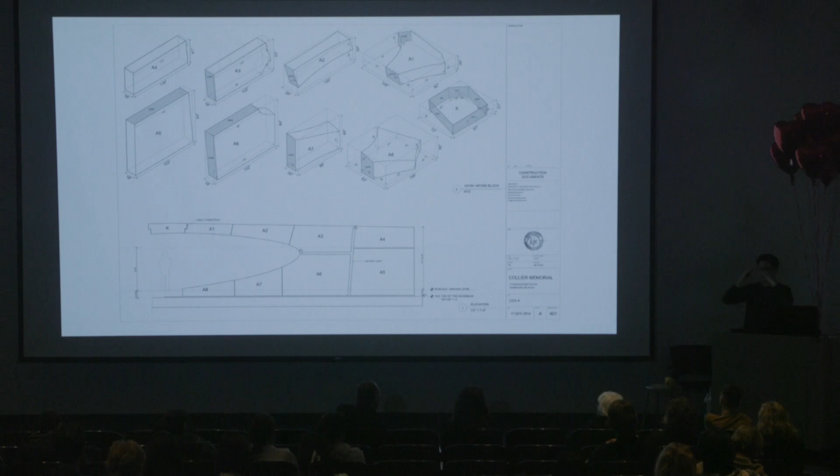Gothic arches are like this, because the thrust is sort of being managed. But this arch is almost the opposite — it's almost impossibly long. We learned a lot about fabrication.

When I was talking to the fabricator, he said, how do you know where the stone begins and ends and where the saw blade begins and ends? I said, this is a diamond tip saw, so it has a certain diameter, and that's what the robot is using, so the robot knows where the edge of the saw blade is. He said, well, every time it cuts, the saw blade is getting worn, and the diameter is diminishing every time it cuts. So how do you know for sure where the stone begins and where the saw begins? And I thought, oh my God, I don't know.

I thought we had this digital precision — we were obsessed with precision and the digital, our computer model is perfect. But the material thing is different, and the material is wearing the saw at the same time it's wearing the stone. That blew my mind.

Turns out they do recalibrate the saw. They use a laser to measure the blade, and they can actually be very precise with it. But it did occur to me that our investment in digital tools and our blind assumption that a digital tool can be just outputted like a 3D print is actually incorrect. There's a tremendous amount of craft and care that goes into digital fabrication to achieve the outcomes we're looking for with all the precision and expectations that we have.

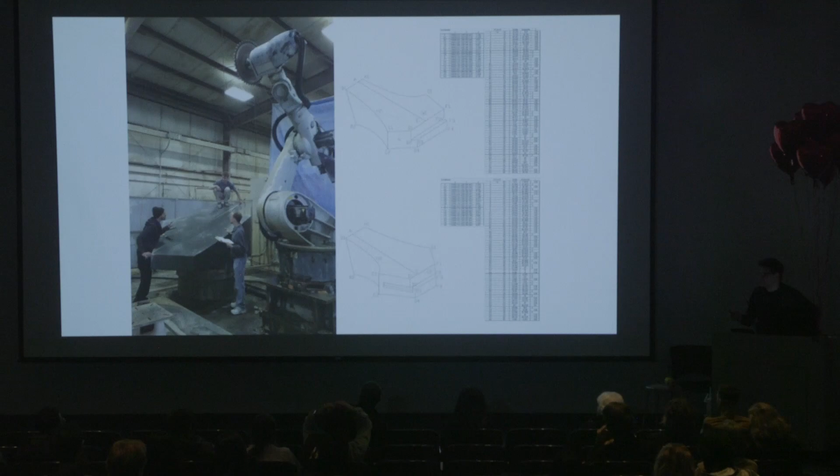So this is our QA/QC process of measuring the blocks as they're coming off the assembly line, to ensure that when they arrive on site, they actually fit together perfectly — so they don't create concentrated loads, so they don't have any spontaneous ruptures or catastrophic collapses. We need the precision to assemble this thing in the field with all of the care that we need.

Look at this vein that moves through the stone. This is a Virginia mist granite that has a feathery white vein, and this is not veneer — you can see the vein moving through the stone, almost like a cloud moving through this block. It's so beautiful. We really wanted to show its massiveness, its solidity and its three-dimensionality as part of the memorial. So here's the keystone, and they're assembling these other stones.

Remember architecture history? The keystone comes last, right? And I thought it should come last, on the scaffold, but the stonemason said, I'm going to put it first. If I build it first, then the chances of it fitting together are much higher, because it's a 5-sided keystone with a step in it — there's 15 faces, 30 faces that have to be perfect for it to fit together. I'd rather do that first.

So they put the keystone first, and they brought the arches up to it. They built this arch in the air, and then brought it to the ground. That's what I learned talking to the stonemason. And I said, whatever you think is right.

John Ochsendorf's PhD students were measuring the weight of the stone with these scales. They're saying you can't see force, but you can measure it. As they were removing the weight on the keystone, the scales in the middle, the weight went down, and the weight on all the other scales went up. So they could see the movement of weight from the center to the periphery. It's kind of fascinating, and they were tracking it in real time.

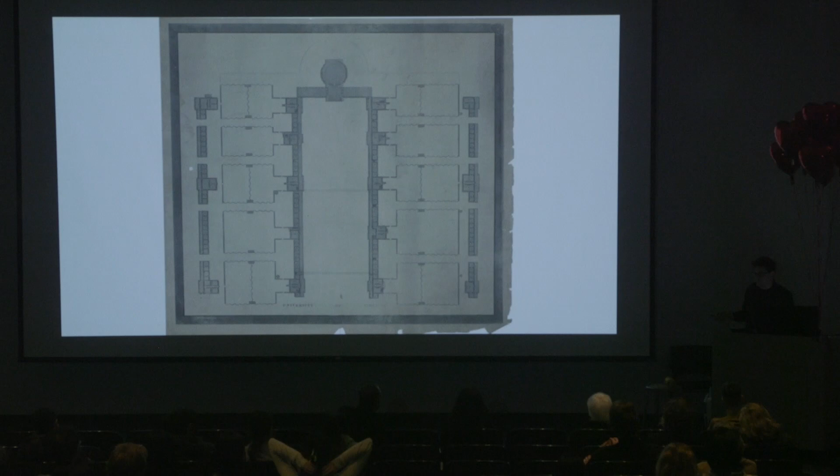This is the University of Virginia. I talked about the academical village—these are the serpentine walls that enclose the gardens. I've always thought, how clever: Jefferson's an architect designing these serpentine walls. They're self-stabilizing, so materially efficient. This is reason, the architecture of pure reason.

I teach construction, and this is the new book called Design for Construction, Tectonic Imagination and Contemporary Design. I just sent it to the publisher, so I'm really excited about that. I look at the process from concept to construction, and each chapter is loosely based on a lecture I've done in my course.

When I teach Jefferson, I used to teach it almost like an engineering project—how do you get the wall to stand up? When we started working at UVA, we realized that this academical village from our history class describes a kind of utopian society.

The professors live here, the students live here, their books are over here, they sort of exchange ideas in this sort of perfect landscape. Here's Jefferson, the visionary, founding father, architect, Renaissance man.

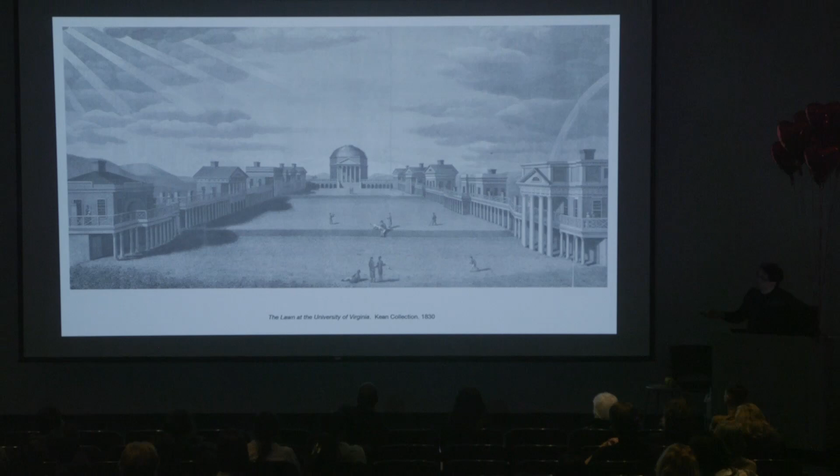But no one ever talked about who built this architecture, and who kept it going. And so if you look over here, there's some clues hiding in plain sight. This enslaved woman is caring for this white child. And what we don't read about is the kind of enslaved labor that built the University of Virginia.

As scholars looked at this, they wondered about these beautiful gardens behind the pavilions — they seemed like English or French pleasure gardens, but in fact, they weren't gardens at all. They were work yards, labor yards. This is where the enslaved worked to grow food, do laundry, chop firewood.

The section through the lawn shows the pavilion. We think it's a 2-story building — it's actually a 3-story building. Who's living in this space? The enslaved were living in this space. They were working in this space.

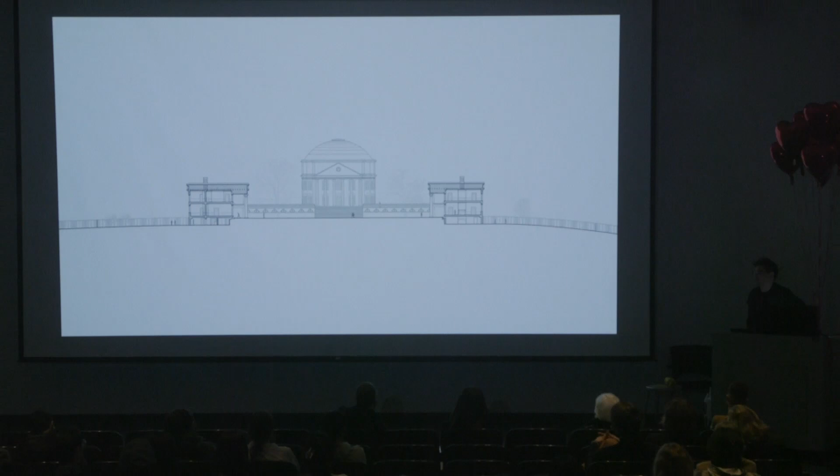And so that serpentine wall that I was admiring as a kind of rational tectonic artifact was actually the screen that was masking that other world from view. Mabel Wilson, our collaborator on this project, a historian, says Jefferson was working as an architect to conceal the institution of slavery with architecture. He's using architecture to hide what he thought was abhorrent. He recognized it as abhorrent, but he felt powerless to change it. He couldn't imagine a world without this free labor.

So this is the team we assembled: Mabel, our historian; Frank Dukes, community organizer; Greg Bleam, our landscape architect; Eto Otitigbe, a visual artist. This is the team we put together to think about this very difficult challenge.

UVA put on an RFP. How could we possibly respond to it? What expertise do we need to even think about this? At the interview, we presented a schedule: we said we're going to do 6 months of engagement before we even design anything. We don't have any ideas, we're not going to show you any sketches — we're going to figure this out together. That was really important, because you can't start designing for a community without listening to what they're interested in.

Here's Mabel and Frank at one of our charrettes. We met with students, heard what they were interested in. We also met with descendant communities — a lot of the descendants of the enslaved lived in Charlottesville. They said, we don't go to campus, we call that the plantation, we don't feel welcome there, we're not going there.

So we're saying, well, we're building a memorial, and in a way the community is one of the audiences for this memorial. Where should it be? Should it be on the lawn? Should it be behind in those yards? Should it be elsewhere? This was a proposal that was ultimately selected through this engagement process — a kind of clearing in what was called a triangle of grass, which is the approach to the rotunda.

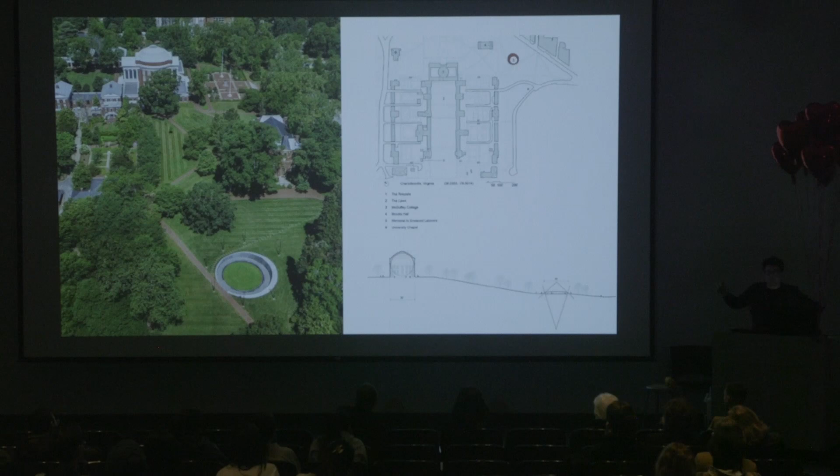Maybe that's the span that you can get with a dome. Maybe that's the size of a clearing that you could imagine people gathering in. What's the size of a community? What's the size of a gathering?

We mocked it up in our studio. Boris is standing with his foot at the wall, his arm outstretched — a line between his toe and his hand creates a slope, and then we spin that around to create the cone. Caleb is standing on the outside, but this angle is, in a way, setting a different cone geometry. So Boris can't see Caleb, and Caleb can't see Boris — one's an interior, one's an exterior, but they're both outside.

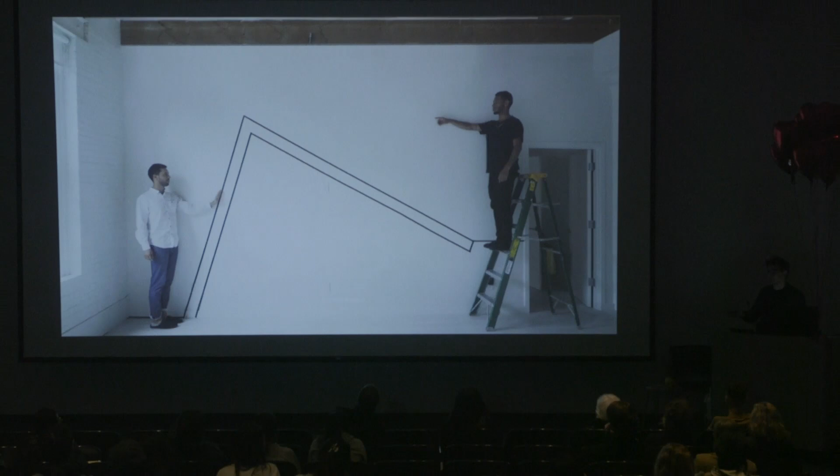And I think, as you imagine, what is the space of contemplation in public? How might we be introspective in public?

I think we have to find a way to mask out the context, to create a space of attention or focus by eliminating some of the distractions that are out there. We had a hunch that this cone-shaped proportion might create a sense of interiority, a sense of introspection. We mocked up the size of the memorial.

By convening members of the descendant community, we stood in a circle and said, in a way, this is the memorial. This implied figure of the circle is the community standing together and recognizing itself as a descendant community. In a way, that's a perfect rehearsal for a memorial, which is meant to gather a community, to bring them together.

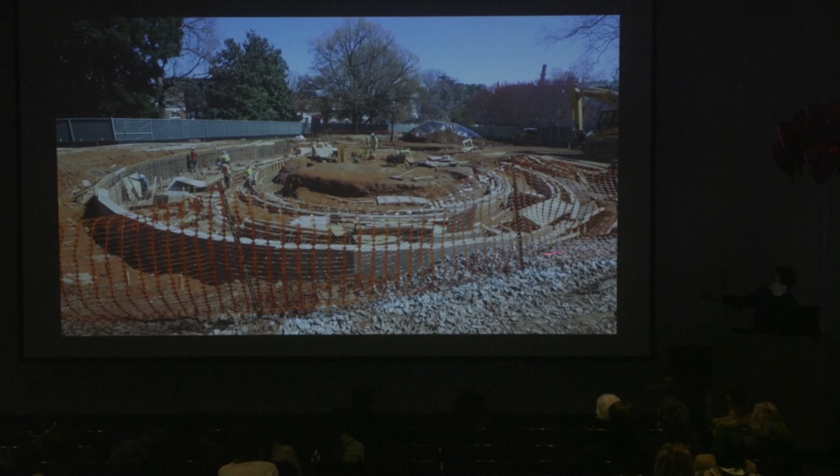Ultimately, that circle is defined by concrete and stone, not just people standing together. It has the cone-shaped geometry of that sweeping curve. It's assembled out of multiple parts, but it produces what I call a horizon line. So when you're standing here, you're looking over it, then pretty soon it's over your head, and pretty soon everything else disappears, and you're left with this central figure of grass and the inscriptions of the names on the wall. So we're creating a sense of attention in a public realm, which is incredibly difficult to do.

Eto, our collaborator, was responding to the community's request to have a representation of an enslaved person. Remember the Vietnam Memorial is so abstract, it's so hard to imagine—the Maya Lin piece was complemented by a statue of three soldiers, a very realistic statue. In a way, the inability of the memorial to create that representational recognizability is how it landed with adding a sculpture to the abstraction of the memorial.

So Eto was saying, I'm interested in this texture of the stone grave, and I found this photograph of Isabella Gibbons, who was an enslaved woman at UVA, enslaved by one of the faculty. She learned how to read and write, and she wrote about her experience, so she was, in a way, a witness to this practice of enslavement. After Liberation Day, after the Civil War, she stayed in Charlottesville and became a teacher. So she became this sort of figure.

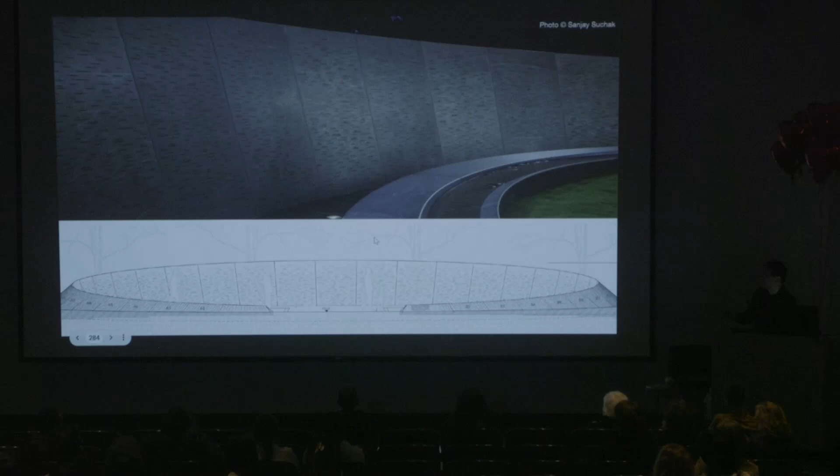And we only have 311 names, right? So how do we memorialize 4,000 when we only know 300? So the challenge was, how do we organize the names that we know, and how do we make space for the names that we don't know? How do we, in a way, create a kind of future position, a holding place?

And so we started to use these underscores. It's like saying, there's a name that belongs here, we don't know it. Isaiah, we know. Henry, we know. Sometimes we know last names, very few last names. And then we know trade, we know what they did. Or we know their kinship, this was the mother of so-and-so.

And so we carved Jack and Woodcutter, Charles and Joshua when we knew them. When we didn't, we just left a blank.

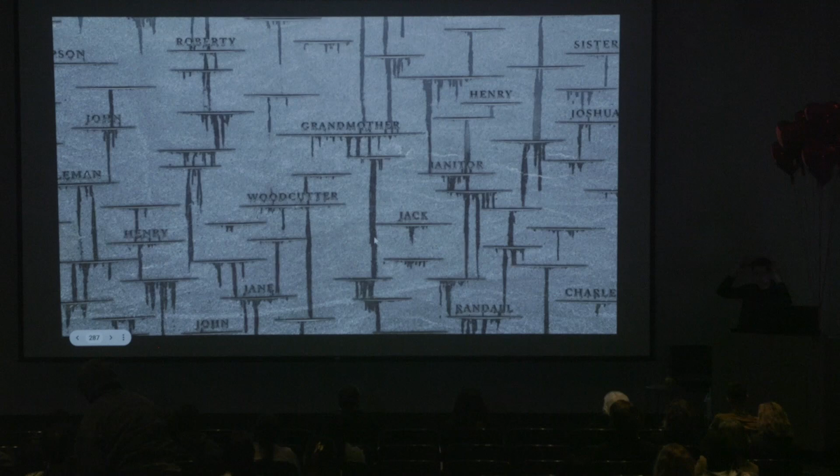I was photographing this over a summer, and there was this afternoon shower, and it just poured rain, and then it stopped, and the rain dried up, and the water was trapped in these cuts, and it started to drip out, like the memorial was crying, or like it was bleeding. I was so shocked to see this effect, I couldn't imagine that this was happening.

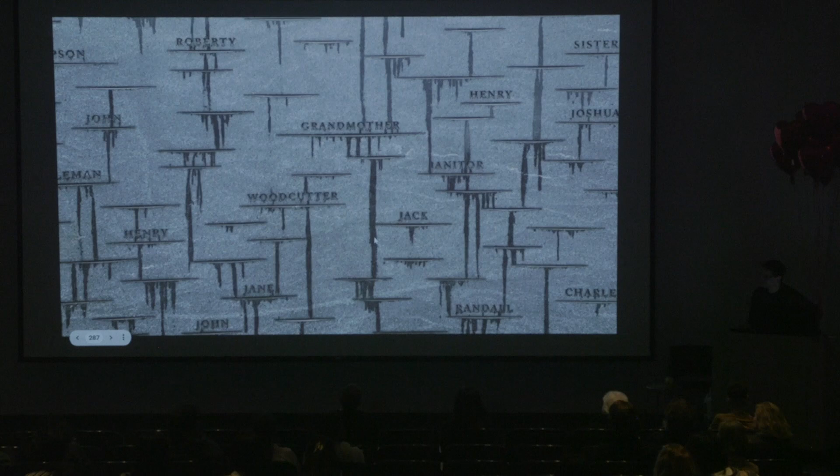Anyways, it was incredibly moving to see the memorial almost become animated like this.

And so if you visit the memorial, you'll see the rough face on the outside and the smooth face on the inside. This is Meejin looking at the water feature. As the memorial was completed...

The completion of the memorial coincided with the pandemic, and so the campus shut down, everyone was sent home. It also coincided with the murder of George Floyd. And so people came to the memorial to find a place to think, to try to make sense of the world, to come here by themselves or with others. Many of them took a knee.

And then the memorial became this site of gathering. It wasn't intended for this - it was intended to think about slavery and history, but it became a place to think about the present and the legacies of slavery and the persistence of racism. Very quickly the memorial became this sort of gathering place.

This is the UVA Medical School gathering at the memorial to take a knee, to reinforce the idea of community, to pledge to treat each other with respect. And so this sort of impromptu gathering of medical staff around a stone ring gave it meaning, right?